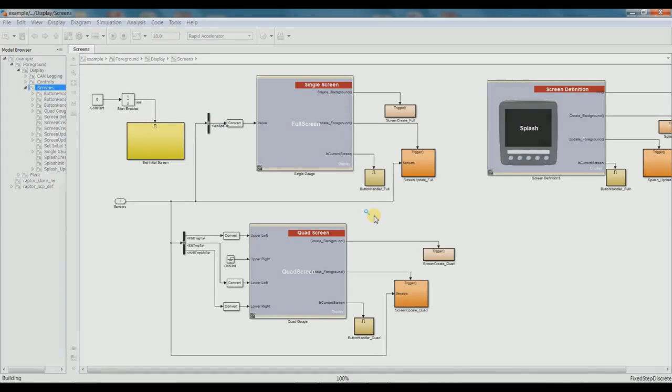Press Ctrl B to build your model, and this is exactly what you get straight out of the box with Raptor Dev, and it is fully functional. I'm going to pause the video while I build.

Now that the model is built, we have our PC simulator of the VeeCAN 320. Here we see the main screen with the fault simulator icon in the top right left hand corner, and if we use the first button to navigate to the second screen, this is our quad screen.

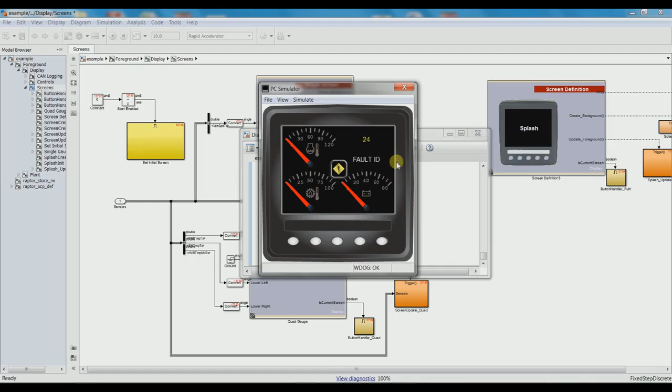We have 3 gauges that can be hooked up over CAN to any network you prefer. There's a fault simulator in the top right hand corner, and that is also a simulated demo sensor, much as the first screen is at the moment, but those can also be changed to be connected with over CAN.

Now that we have our template working, I'm going to create a new project with the same template to show you how to modify it and what you can do with it, all within a short amount of time. So feel free to continue to use the model that we just created with your Raptor demo template.

Alright, open up your Raptor demo template, but we're going to actually navigate to the MATLAB's library directory. So click right there, and you're going to want to drag in the demo library SLX from the Raptor demo package.zip that NewEagle has provided, and we're going to use this library for development in the model.

Alright, so now what we want to do is navigate to screens. You go foreground, display, screens, and now we're here. So first thing we're going to look at is this full screen.

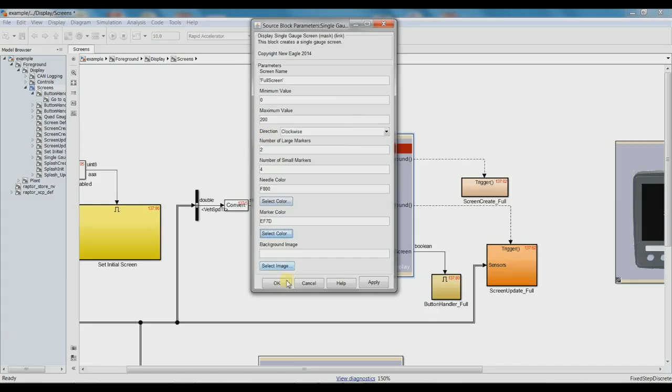That's actually a Raptor block. So now we're going to open up full screen, and notice there's lots of options what we can customize this Raptor gauge for. Make sure you set the maximum value to 200, and then you can change whatever you like on this. I'm going to change the marker numbers so I can have 2 and 4, and we're going to have the background markers be gray and the needle be red.

Now we're going to head over to the update function of the full screen. Head in there, and we're going to delete the green one, which is the fault draw icon block. So we're going to get rid of that. It's just going to get in the way for what we need.

Here we have 2 places that handle buttons: the create background and the button handler. The button handler basically dictates what the button does, so if you press button 2 in this case, it's going to use the Raptor go to block to go to the quad screen.

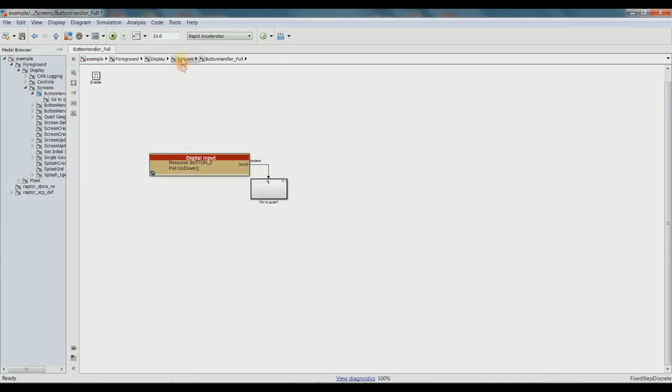Now we're going to change what our buttons look like, so head over to the create background function, and now we're going to go to our MATLAB images directory because we need some custom images for our buttons. So here's our images directory within our Raptor Dev demo package. So navigate there and copy and paste all the images in. Just like that. There we go.

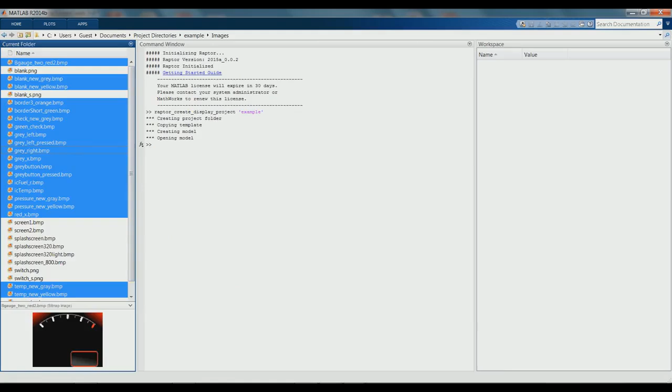Now we're going to head back to the model, and what we need to do is insert a Raptor reference image block. Head over to the MATLAB Simulink directory, type in image, and it should be the first one there - actually it's the second one, so drag that in. Right click to drag because we're going to need two of them.

We're going to need a not pressed and a pressed image. The first one we're going to have a gray not pressed square, the blank one at the top, the third one in, and then for the second one we're going to do the same thing but get the yellow one, so it looks like when you press it, it turns from gray to yellow.

Now we need to open up all the buttons that we're not going to use, such as button 1, 3, 4, and 5, and we need to set those to images from ports. So check that box, and we need to drag the gray one to all the top not pressed ports, and then we need to drag the bottom one, which will be the yellow button, to the pressed ports. I'm going to pause the video as I connect all these up.

Now they're all connected up, what we want to do is set the second button's images. So we're going to open that up, press select image, and notice you're in the default Raptor library. We need to head over to our MATLAB images directory, so navigate there, and I recommend you copy and paste the link in because we need to do this twice. For the pressed image we need the yellow right arrow, and then for the not pressed image we need the gray right arrow.

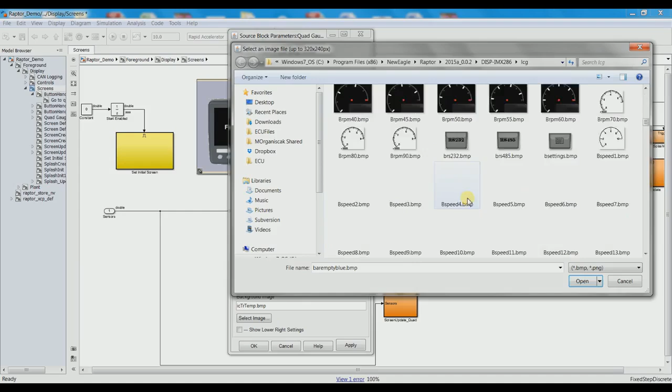So those two are disabled, and now what we're going to do is for this one we want to have the values be correct. So for our project we need 0 to 150, and then we're going to go down to the image. Press select image, and that's going to pop up the default Raptor library, which is what we want in this case. So find the fuel temperature - you guessed it, this gauge is going to be the fuel temperature.

And then the second one, what we want to do is have 0 to 100. I'm sure you can guess what 0 to 100 is now - it's definitely going to be the fuel level. So go down to the fuel level icon, which is, there it is, and press OK.

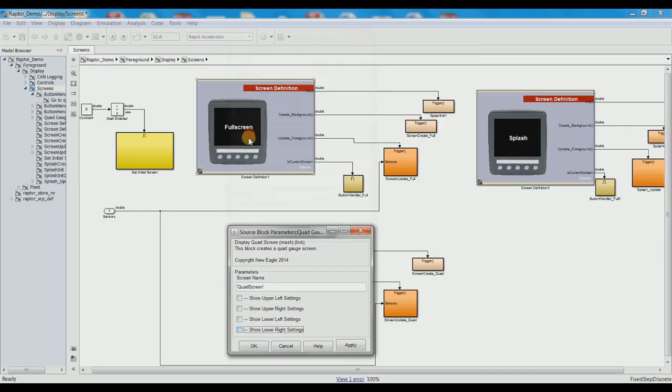Actually, before you press that, you want to change the needle color. So select, we're going to use yellow - you can use whatever color you like. There's a bunch of colors to choose from, so press select color and then pick whatever color you'd like.

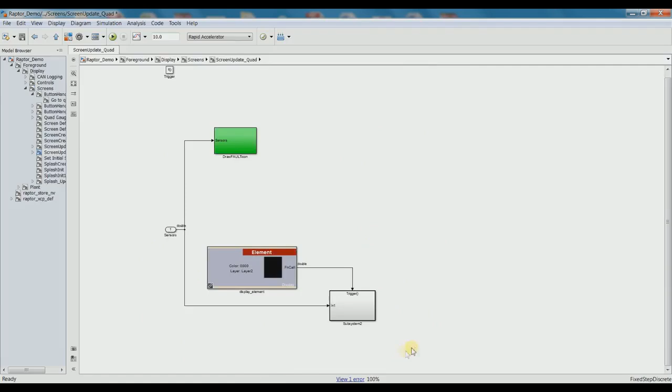Alright, so now we're going to navigate to the update function of the quad screen. Double click right there, and you see all this content in here. It's actually in our way, so we're going to select all of it and delete it. Keep the trigger at the top, we're going to need that though.

We're going to head into the Simulink library browser. We're going to type in if, scroll down to if, and we're gonna pull in the if block, so it should be down here - there it is. So we're gonna drag that in, and what we need now, if you were gonna do this by hand, you would get an if action subsystem block, and I'll show you this - it is right here.

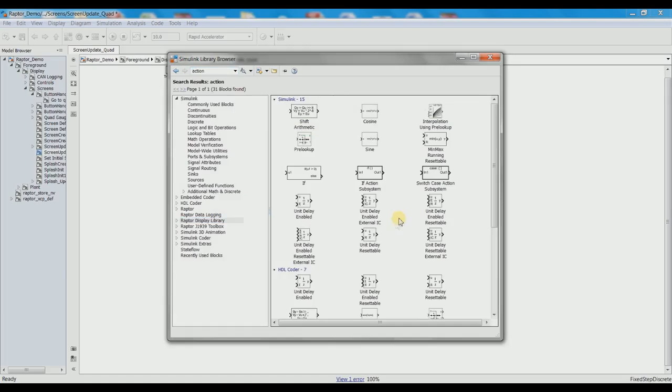We're gonna drag that in, and if you're gonna do this by hand, you'd put all your content in there and you'd be good to go. But for the demo, we have provided the subsystem for you. So if you want to head over to the Raptor demo library, we're going to drag in the disabled in this case, which is the red one on the left. Bring that one in, and you're going to connect that up to the else of the if block, as so.

And then what you want to do is you want to get the input for the if block, which is a Raptor block. So you type in data, and then you scroll down, and you should see a bunch of Raptor blocks. There they are. You're going to want a data definition, which is that one, and you want a data read, which is that one. So we're going to bring in the data read, and then we're going to bring in the data definition.

The data definition can go anywhere, so we'll just have it here so we can see it and edit it. And then we want to have a name for both of those. So let's use status. You're going to need to have single quotes around the name for it to work. So that's the data read, and then the data definition, we're going to have the same name. And then the initial value is 0. That's what it's going to output by default unless it is changed.

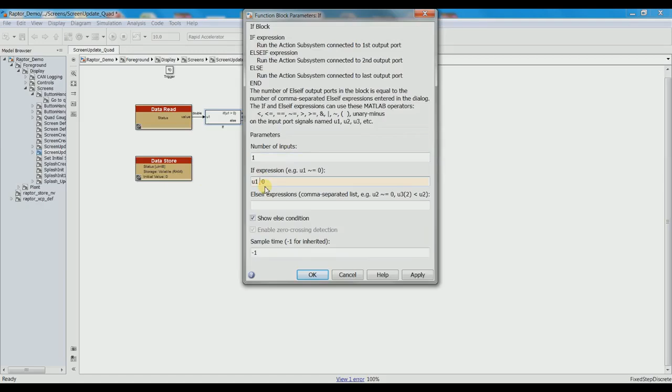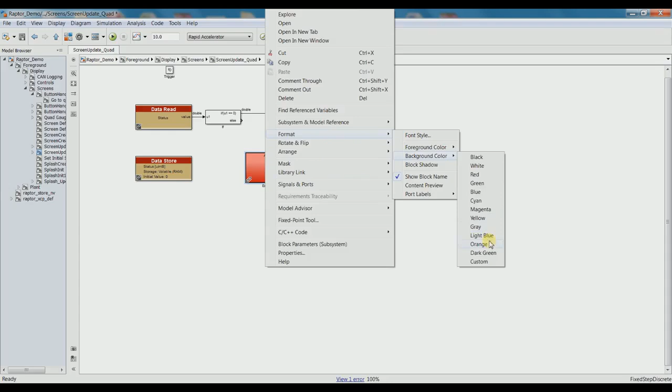Here we're going to go into the if, and we want it to be if it's equal to 0. So set the two equal signs there, and if it's equal to 0, we want it to be disabled. So 1 is enabled and 0 is disabled, so actually connect the disabled to the output of the if. So here we go, we're going to copy the disabled over, and we're going to make that an enabled block instead. So what I've done here is accidentally made the foreground green. Really we want the background green, so change the background to green. There we go. Alright, so enabled green, disabled red.

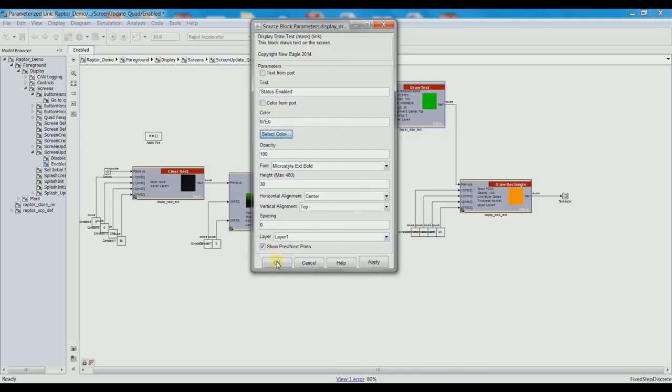Alright, so in this enable block, as you can see, everything is orange, same as the disabled, because they're copied. So we want everything in the enabled to be green. So head back over to the enabled, and if you look in the image directory that we dragged in, there should be a green counterpart to the orange gradient. So we're going to select that, and we're going to change the name from status disabled to status enabled, and then we're going to change the color to green. You don't have to have it green, you can have any other color you want, but for this enabled screen we're going to demo green.

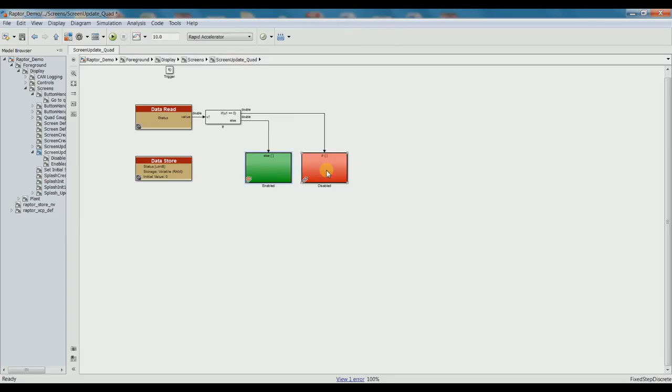I have green there and there, so that is the enabled color setup, so it's that easy to just change the colors around. And then now what we're going to do is make this work. Since we deleted the sensors, that line is no longer connected, you can delete that. And we're going to go to the button handler now. Now in the button handler, what we want to do is make sure we have 3 buttons. So we have buttons 1, 4, and 5.

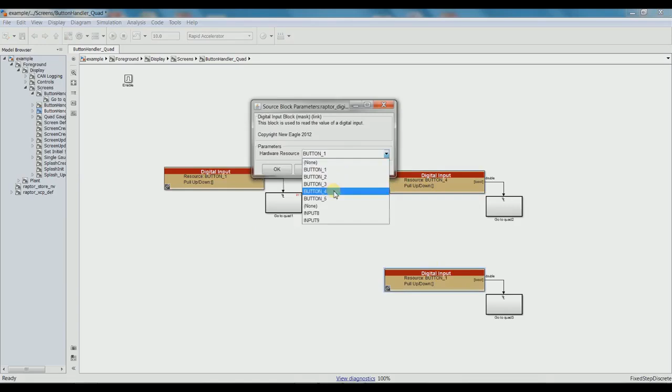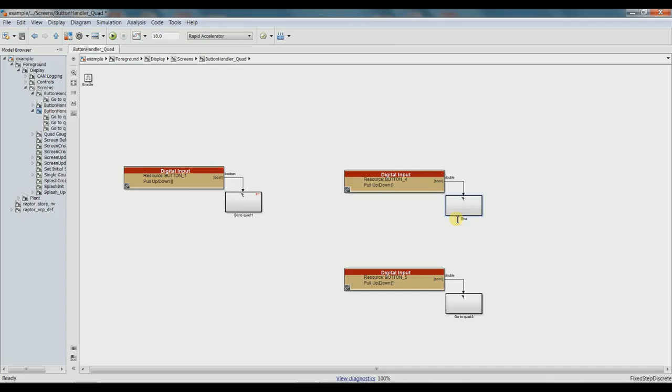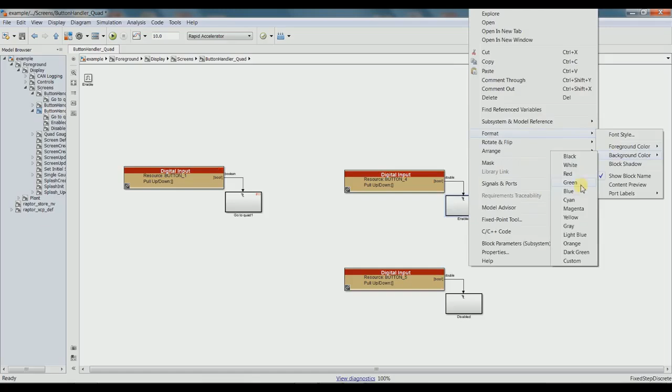So we're going to open them up and make sure it has 1 for the first one, and then 4 and 5 for the second 2. The first one's going to go backwards to the main screen, and then button 4 is going to enable the status screen, and then button 5 is going to disable the status screen. The button handler is an essential part of any display because it lets you navigate between your screens with ease. So I renamed them enabled and disabled just for ease, so when we come back we can find them quickly. And also gonna recolor them. That's a nice feature. You can have them red and green for corresponding colors.

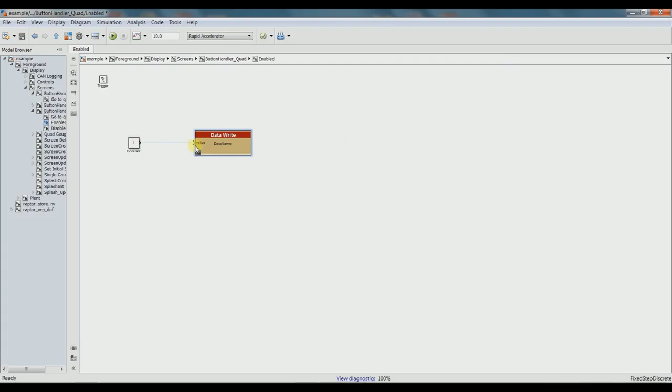What we're gonna do here is go into the 4th one to create the button handler for this one. Here in enabled we want a constant and a data write block. So the constant is 1, so whenever you press this button it's gonna data write to the status screen a 1, and then if you remember we have 0 and 1 on that if block, and 1 is enabled and 0 is disabled, so that 1 is now going to be transmitted to the status data. That's going to make our screen enabled for us.

And then this one is going to be set to 0, and that's going to disable it for us. So that is all set up there. Now we're going to head over to the create background and change the images of the quad screen buttons.

For button 1, we want a left arrow because we're going backwards to the first screen, so we need the gray one and the yellow one for not pressed and pressed. Make sure you navigate to that MATLAB images directory. I'd recommend you copy and paste that link, it's a lot easier to get to that way.

And now over in the second button, we're not actually using the second button, so that's okay, we can just set it to a blank gray and a blank pressed for the yellow. For the third button, we're not going to actually use that button. We're going to use those blank buttons we used in the other screen, the gray blank and the yellow blank. We can navigate to those directories, paste that link, get the gray one, do the same for the yellow one, paste that in and get the yellow one.

So what we want to do now is go to the 4th button. So for the 4th button, we're going to use the check mark for enabled, so there should be a gray check mark right there, and then also a green one. When we press it, it's going to show up green, and then it'll enable the screen. For the 5th one, we have an X, so open that up, paste the link, and get the X.

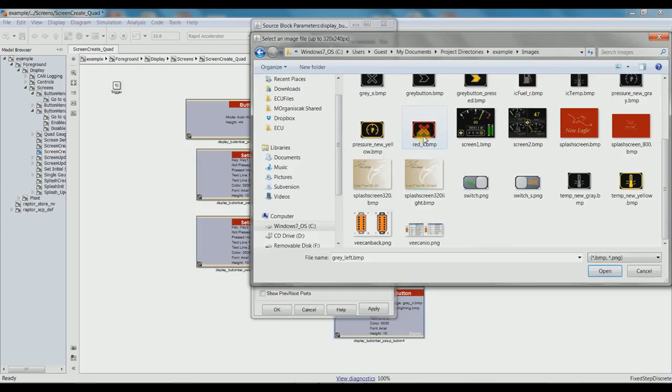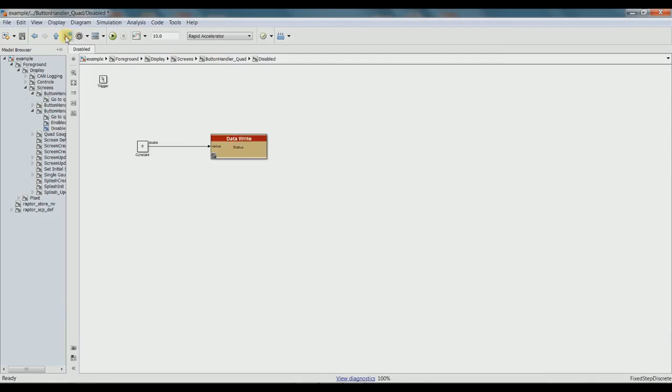Now we have all our images in the button handler for that quad screen. We're done with it, and we can head back up to screens to do something else. So if we went to build this right now, we would run into a little error of a unit conversion. So you can change the type on the block, or you can actually go into the library and bring a conversion block in. So if you just type in conversion and drag that conversion block, put that there, that'll convert it for you. Or you can change it in the constant itself, but for now we just use the data conversion block.

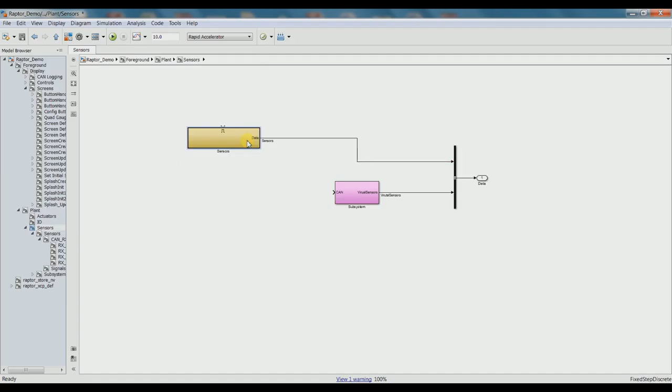So for the last part, we're going to navigate back to foreground, and we're going to click on plant and then sensors. We want to delete everything I delete, so demo sensors, the top Raptor block, the merge block, and that line into virtual sensors. And now connect your sensors up there and open up virtual sensors, delete all of these, everything except the time block and those 2 blocks in the top right hand corner. Set your bus to 2, and you can make it look pretty if you'd like.

And now navigate back up to sensors, open sensors, delete that enable, and then open CAN. Delete the top 2 CANs and the last one, set the bus to 1, or completely get rid of the bus, and then connect your CAN up to the signal. So here what we're going to do is set up the CAN communication. So we're going to open that up, and here is your standard CAN message block. This is what it should look like.

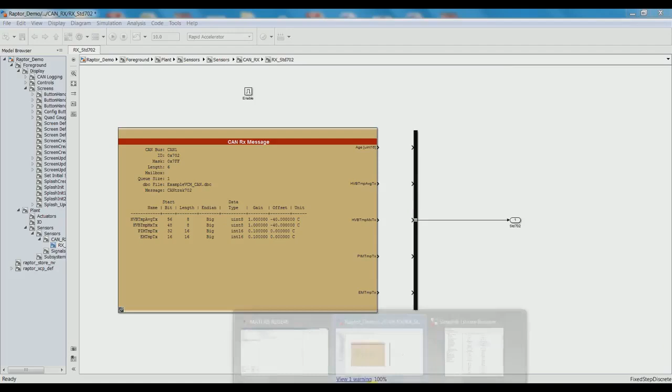Now what we need in here is an enable. So we're going to take the enable, and it is right there, sixth one down. Pull that out there, put that on the top, and we'll use that later. We're going to disconnect all these CAN messages just to have a clean start once we load the new DBC file, which is going to come from the Raptor demo package that has been provided.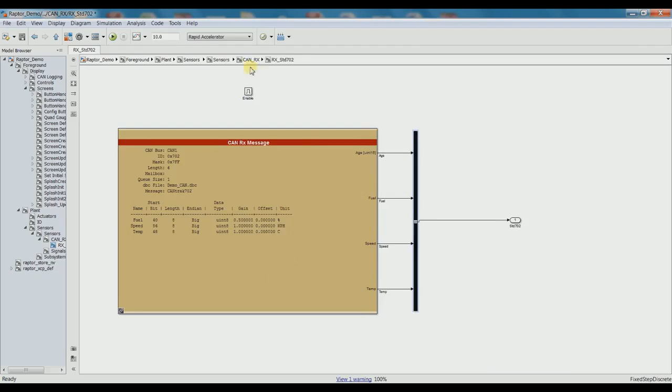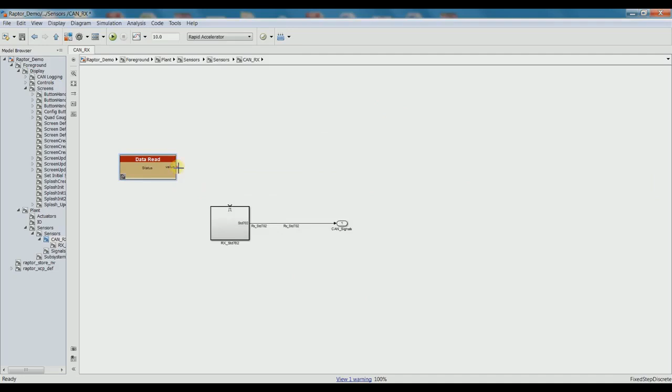And now head back over to sensors, and what we want to do in this CAN block is make the enable and disable status work. So we use that by using a data read from one of the Raptor blocks. We put that there and then name it status as we have ours named, and basically we want, when it is 1 we want it to be enabled, and when it is 0 we want it to be disabled.

So that needs to be 1 for this to work. So we're going to set a compare to constant, and we're going to have equals equals 1. So it will only be enabled when it is 1. Now what we're going to do is head back over to screens and connect up the main screen and the quad screen. We'll start with a quad screen, and what we need is a bus. So specifically a bus selector.

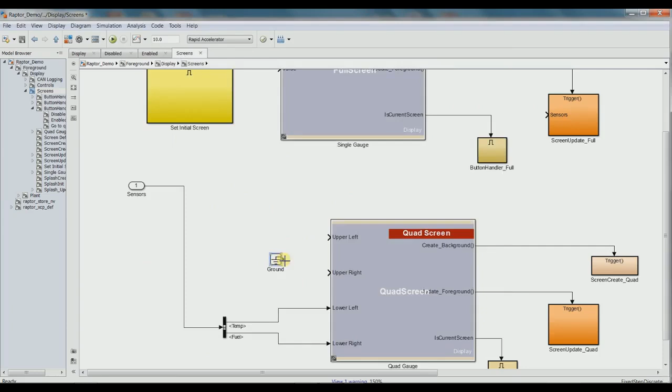We're going to want to connect it up to the lower left and lower right gauges. So we're going to port the temperature to the lower left and the fuel to the lower right, because those are what our gauges are for. And now we need a ground. So the ground is going to go for the top 2 just to clean up those. We're not using those, so we're just going to ground those ports.

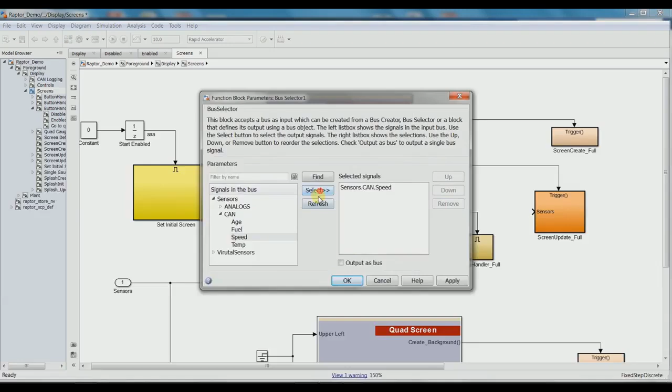Now we're going to set up the CAN signals for the main screen. So what we want to do is get a bus selector and put that in front of the full screen, and then hook up the sensors to the back of that. We need to select the CAN sensor of speed and then connect that further to the full screen. Connect the main sensor line to the update function of the full screen, and then we're going to go inside of the full screen update function and port that.

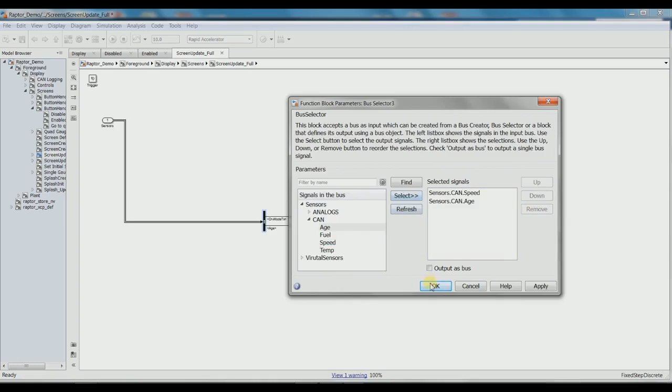Make sure it's on the bus for the gear indicator. So the gear indicator was going to have 2 incorrect CAN signals. We need to delete those and put our own speed and our own age into those as such. Now actually go into the gear indicator subsystem, and then furthermore into the bottom right subsystem. In there we're going to change and look at 4 of these compare to constants.

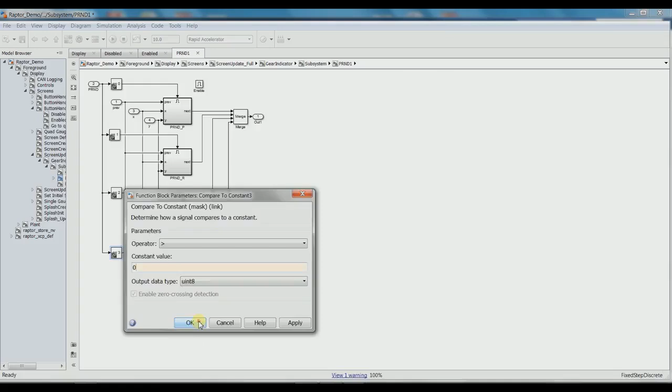The middle 2 are going to stay the same. The top one is going to be equal to 0, which will stay the same, except the very last one needs to be greater than 0. What this does is ensures that our gear indicator is in drive when the speed is increasing or anything other than 0. Alright, I believe we are ready to build.

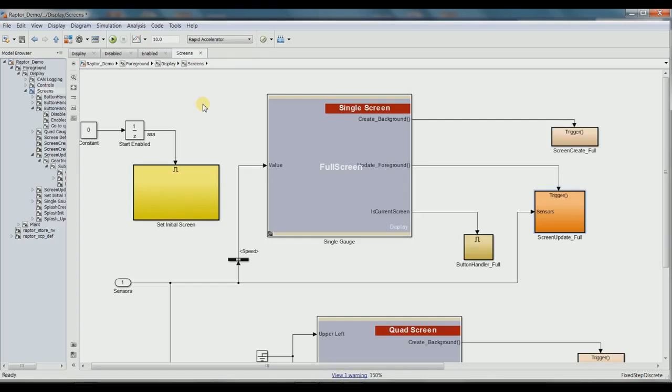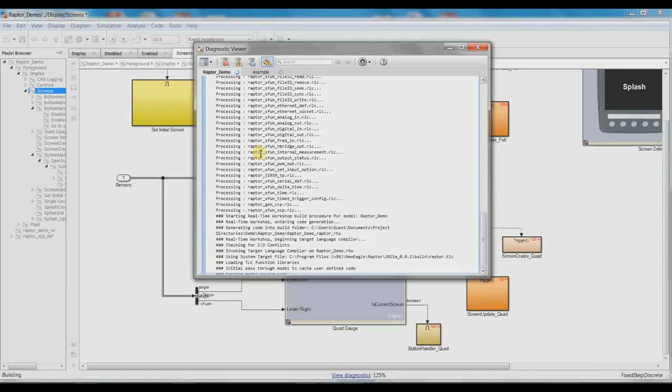You can press Ctrl B to build, and if you're using this version of MATLAB, you can press View Diagnostics to watch it build, or if you're in an older version, you can go to the MATLAB command window and all your information will be there. Your PC simulator will build shortly, and we'll take a look at that when it's done. Alright, here's the PC simulator, all built from our model.

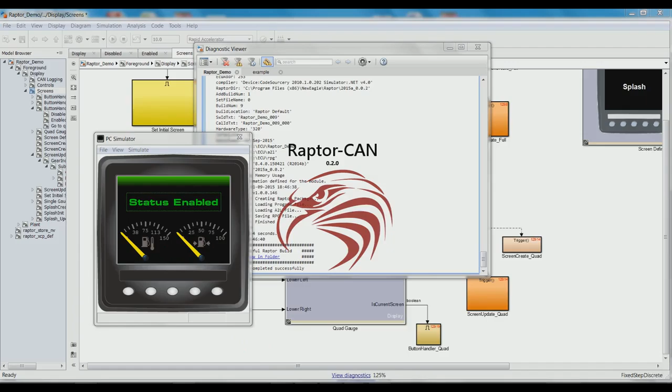We're gonna take a look through the screens here, and as you can see we have our status disabled at the top, and we can enable it using the 4th button. There we go, and switch back and forth. So what we're gonna do now is we're gonna make sure the CAN works. We're gonna open up Raptor CAN, another New Eagle Raptor tool, and this one lets us, among other things, monitor and simulate CAN traffic.

So we're gonna go over here, we're gonna click on simulate, we're gonna add our demo DBC file. So here's our demo CAN right there. You're gonna click on that, bring that in, and if we expand it, we'll see fuel, speed, and temperature that we've been using throughout the project. Make sure our status is enabled, because we have a check that disables the CAN traffic, and turn it on and start dragging your speed, and you should see your main dial moving up and down.

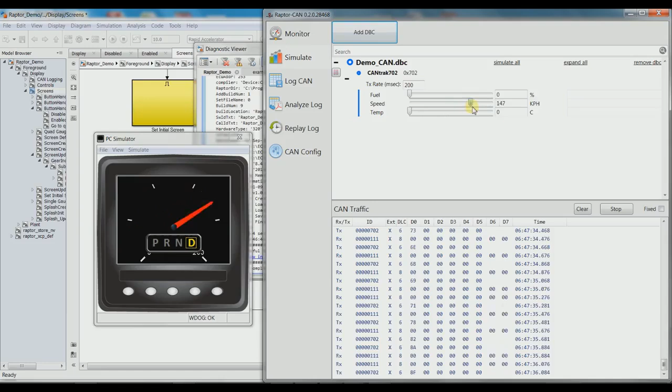We only have 5 markers, so we can increase that up to as many as we want so we can have a more refined image. Here we have fuel and temperature going up on the second screen. They're functioning correctly.